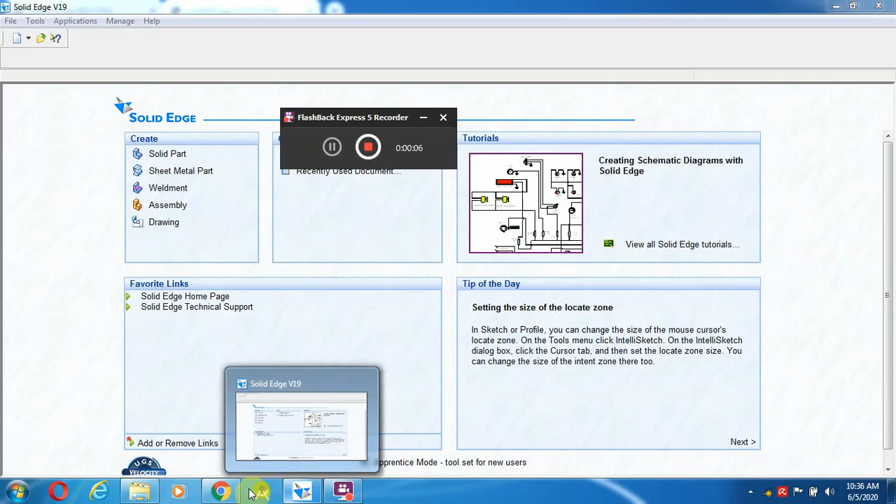So the lathe tool holder component will be shown over here, with sectioned front view, top view, and side view. These are all the things we have to draw in the sketchbook without dimensions, and neatly we have to draw. That is the point to remember.

Then comes to the parts. There are totally 11 parts in the tool holder: tool holder, base plate, mover, stud, handle, knob, ball, spring, set screw, grub screw, washer. 11 parts are there. We have to create these with Solid Edge.

After creating them, we are going to make the assembly with the help of the assemble tool on the Solid Edge software. So first we are going into the solid part, and after that we are going to create first the tool holder.

First part is the tool holder. There are only two views given: a sectional front view as well as the top view, provided for the tool holder. If you see the full sectional view, only these portions have material.

These are all holes, as well as here a V type of hole, a bottom V type hole will be provided, and also one more cylindrical hole, and another cylindrical hole that goes throughout the component.

And also there are certain blocks they will be providing, like 1, 2, 3. Here they have not given it as a circle anywhere, so it becomes a square or rectangle. The dimension given is for a square, so the length is 150 on this side and 150 on the other side. This is how we have to create it in the software.

First we can go to the protrusion command. We select a front view, or you can select the top view. I am going to select a line and go to here. What is the dimension on the top? Actually this and this will come in the same line.

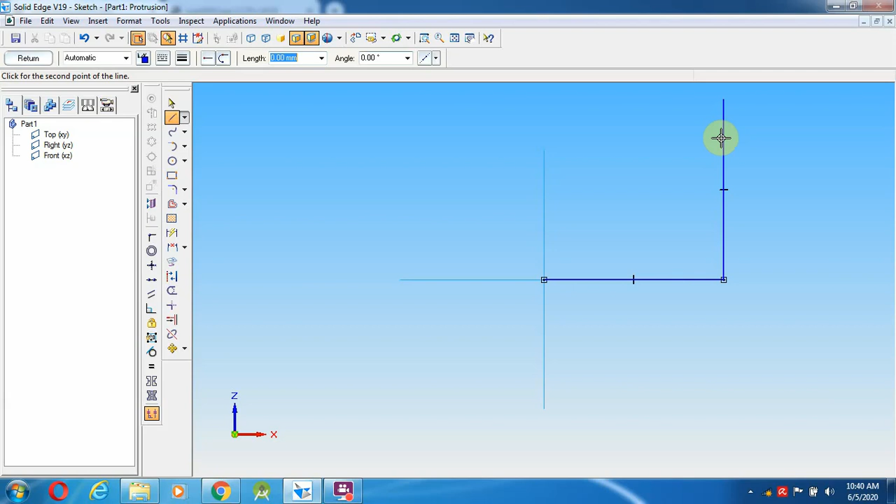Enter, again 75. Now I am going to give 150, and the angle is 180 towards the left side, so that angle comes as 180. Now again 150, enter. So here 150 is going to join over here.

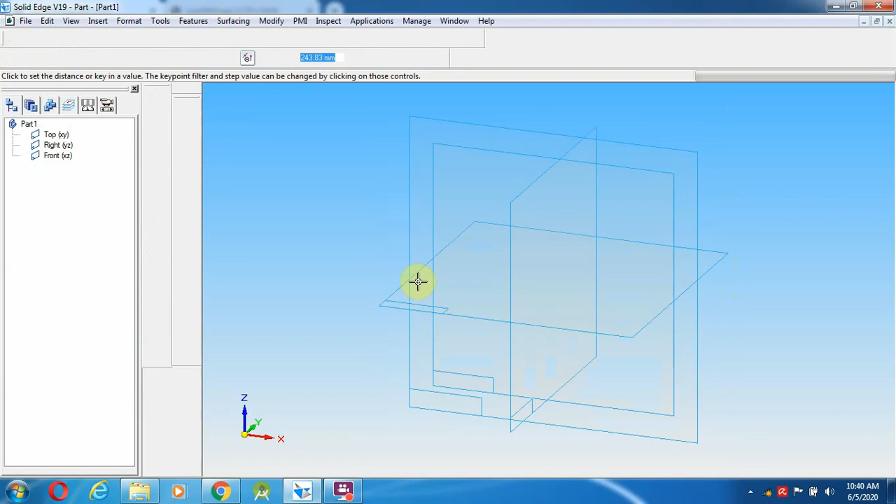Then select the line and delete those reference lines. Then give a return. So how much mm does it have to be? 30 mm in depth. So 30, enter, left and right click.

After giving this, I am going to make another one, the next smaller one. This is also given here as a square of 80 mm. While seeing from here it will also be square, even with the help of this dotted line you should understand. That is the depth of 40 mm.

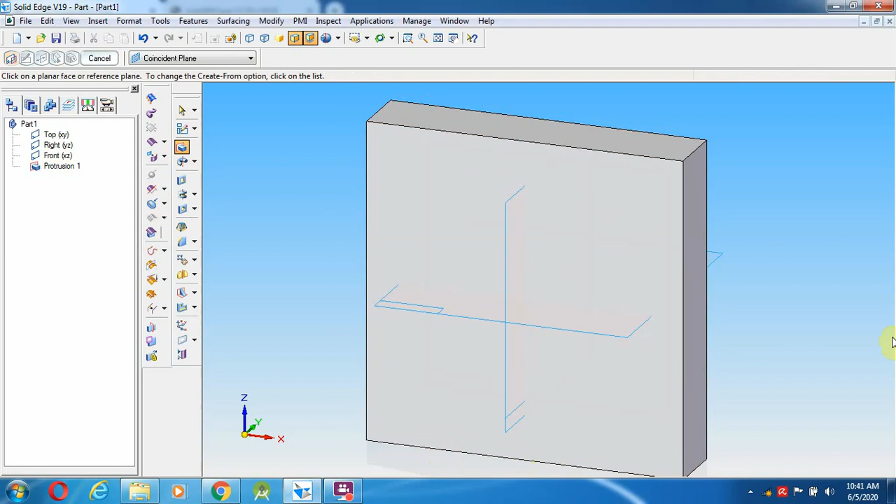Go over here — either this side or that side, you can choose anything. I want to keep the plane on this side, so I am going to select this side to draw the things.

I'm going to select a line from here to 80 mm, meaning 40 mm distance, and again 40 mm towards the top. Now I'm going to give 80, enter, again 80, enter, so 80.

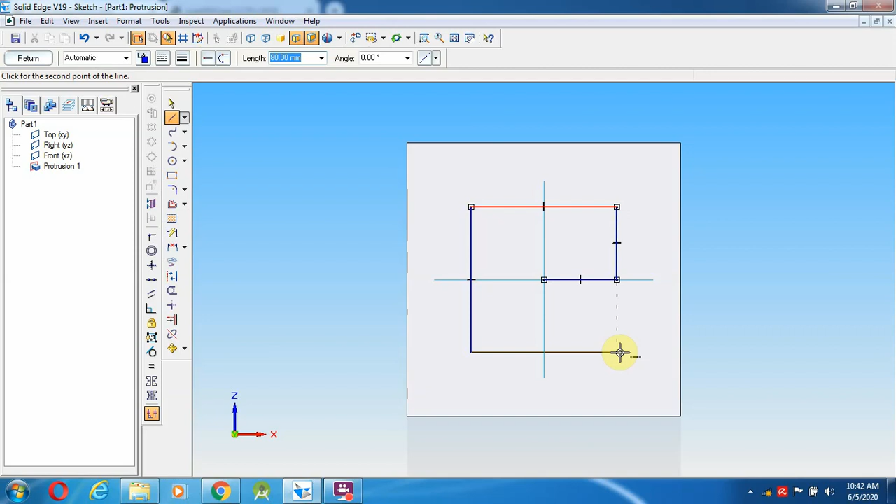Now I'm going to join with these lines, then select the particular line and you can delete that line. Now giving return, so towards this side the depth is 40 mm, it has to come over here.

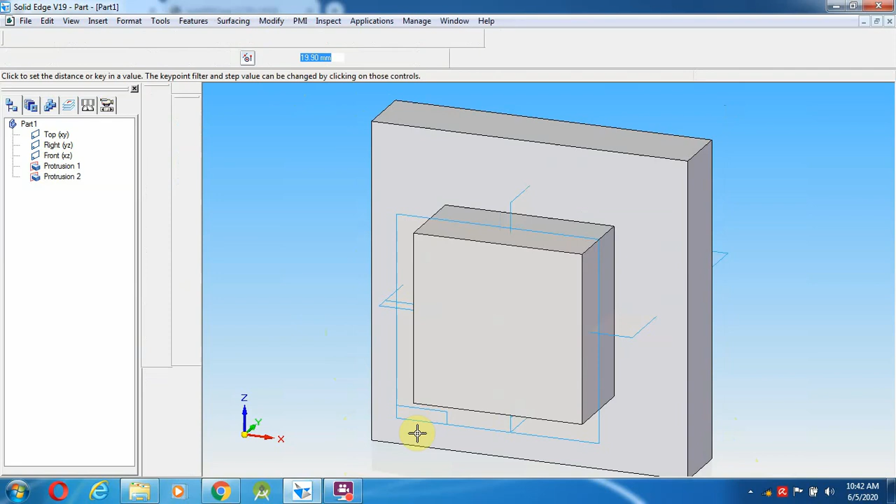After creating this, again go over here, select, and draw the bottom block. The bottom block has the same dimension as the top one. Select the edges over here, and the dimensions will remain almost the same. Give return. This will be 20 mm distance — the depth is 20 mm. Select distance 20 mm, enter, and towards this side left and right click.

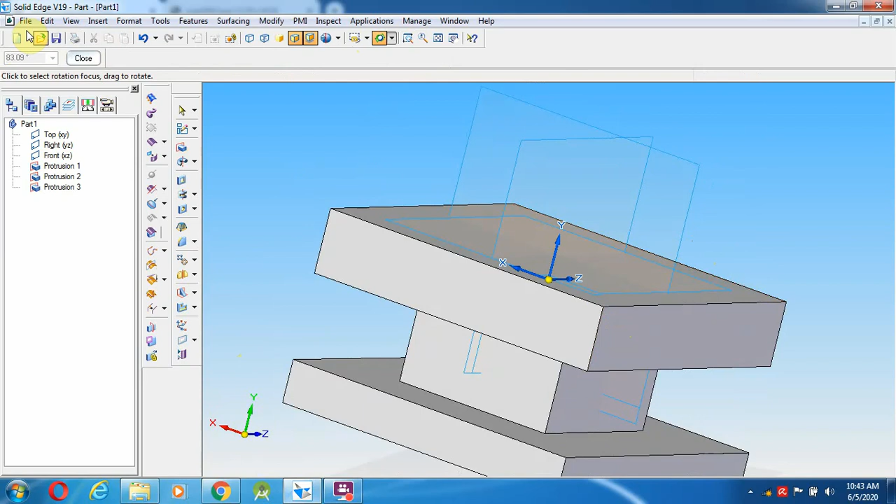Now going to rotate this component, rotate the component, then you can save it. Go to save as, and you can save it in the particular area.

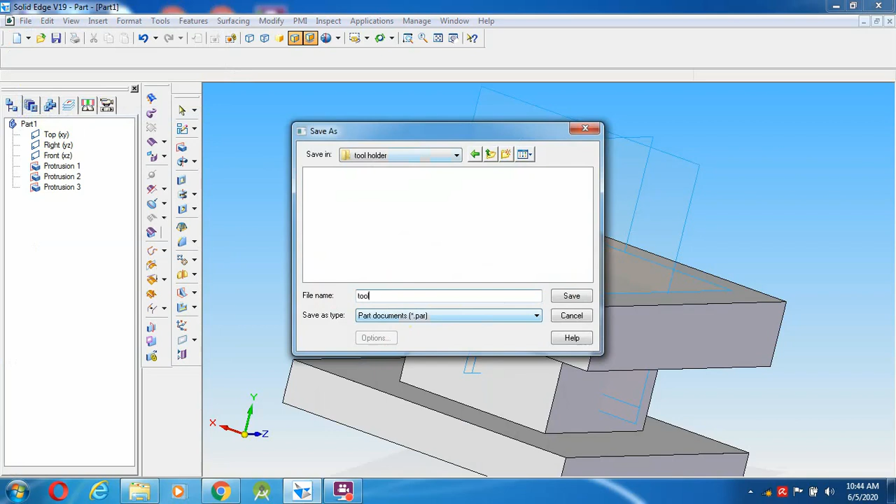So I created the folder over here, tool holder. I am going to save the particular things there. Go to save as, and change save to this tool holder folder. So the particular component name itself I am going to change, make it as tool holder. So the component has to be saved over here.

Still so many things have to be done over here, so that's what I am going to do now. Select first the dimension from here, it has 120 mm, 120 mm length from length and breadth. Okay, the holes have to be placed.

So these holes will be in a continuous line, so from the top it can be viewed. The dotted holes could not be seen from the top, so that becomes the bottom block.

So in the top block there are 8 holes, M16 tapped. So 8 holes will be placed, and it is made with the threaded one.

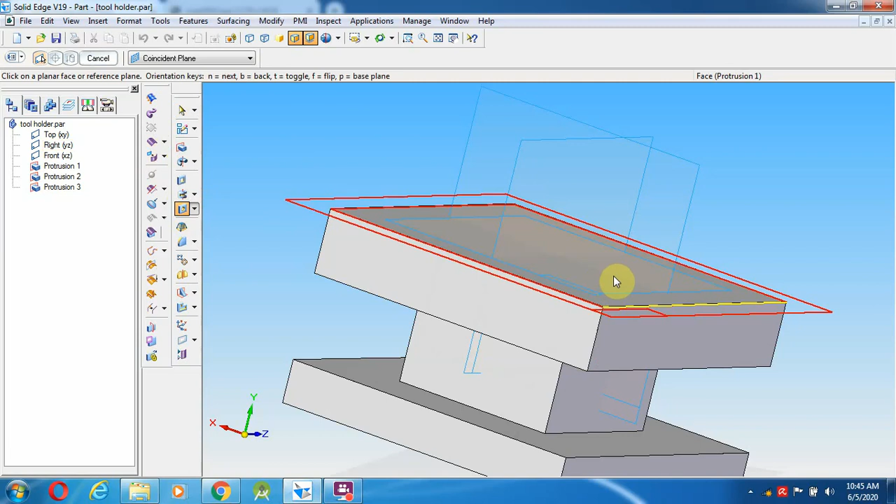I'm going to select the hole command, go over here, select hole command. I'm selecting the top surface. In the top surface I'm going to make a 120 mm distance first, so all the dimensions will be 120.

So from here to here 120, even horizontally they will be showing as 120 mm. So that's I am going to make it as a 120 mm hole.

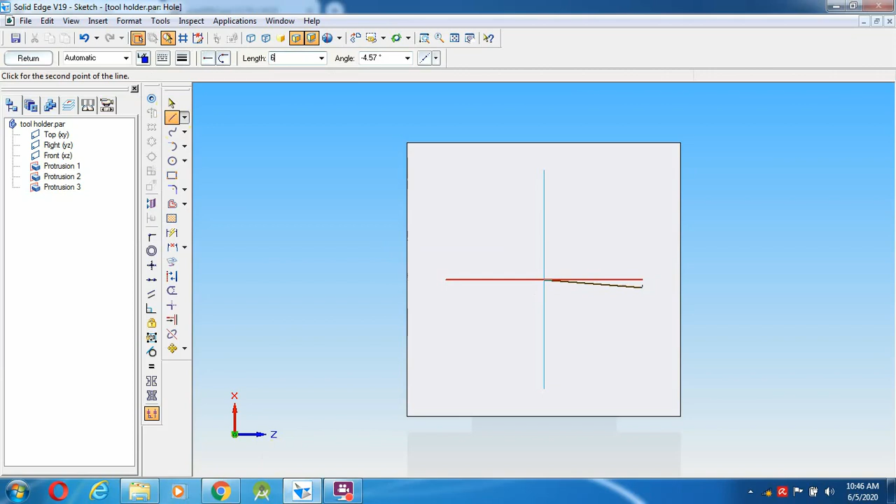So select a line, from here to 60, from here to 60 mm length, and 60, 120, and again 120. So next 120, then I'm going to join over here.

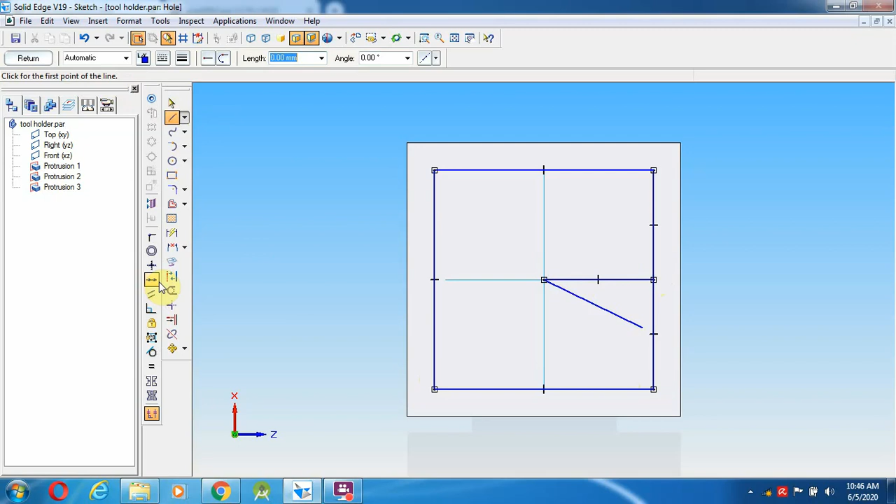So here these are two lines I drew, one line is drawn for reference purpose, and another line I drew mistakenly. So those lines I trimmed over here.

After that I am going to select the hole and change the hole parameters. The hole diameter is given as 8 holes, M16 tapped, meaning 16 mm diameter and 8 holes placed with threaded hole. So go over here and make it a threaded hole with diameter 16 mm.

So go over here, select the 16 mm, as well as the M16 also 16 mm to hole extent. So because the hole is coming throughout, the taper is coming.

Even if you see from here, the continuous line followed by a thin line, thick line followed by thin line means that is the symbol of hole over here. So select throughout that one, and this is the meaning through to next. Even you can give the dimension as through to next.

Okay, and after that the through hole will go throughout that particular top surface. So what happens, the bottom does not require any V shape or other thing.

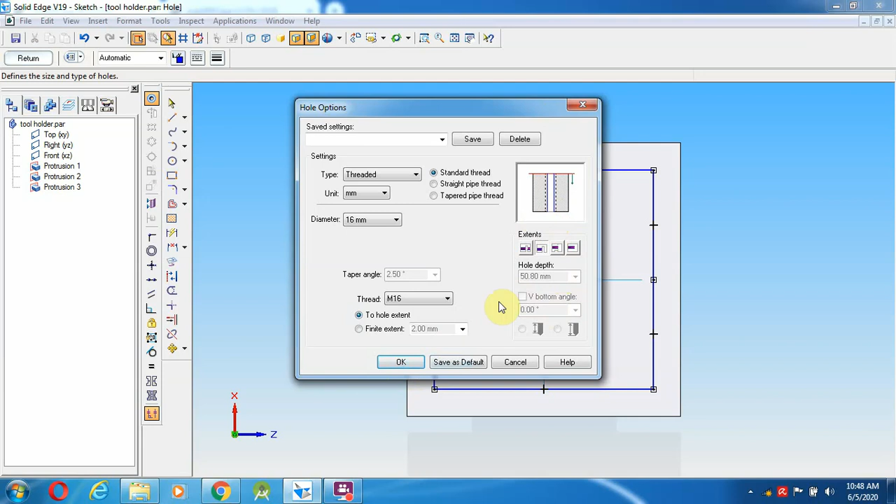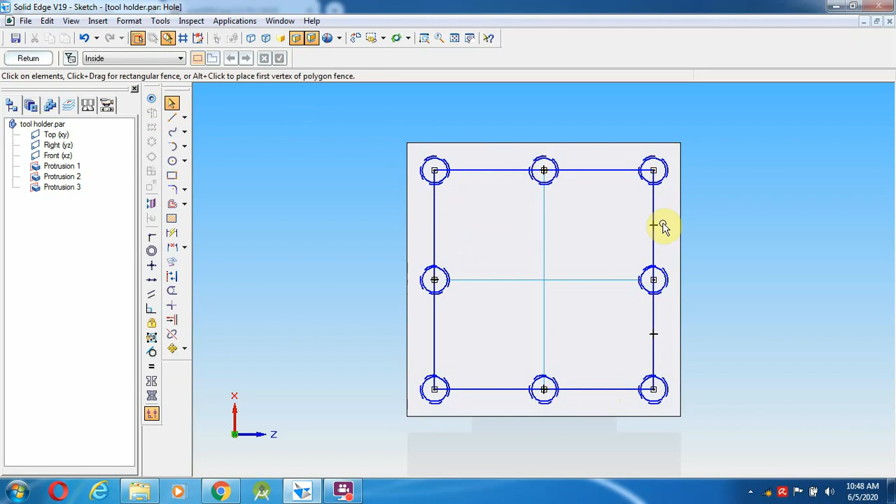So 8 holes: 1, 2, 3, 4, 5, 6, 7, and 8. So there are 8 holes now. From the corners as well as in the middle I am going to place the holes, so corner 4 and middle 4.

So after keeping this, give return towards down, left and right click. If you see over here, the holes have been created in the top. Then after that immediately you can give save.

So after save, then another hole. This other hole comes in the bottom, see over here, it comes in the bottom. Then the 16 mm length the hole is coming, and the diameter is 10 mm.

The diameter is 10 mm and V shape. So here how many holes are there? The dotted holes, see over here, they will be provided over here, so there are 4 holes. Even here in height 4 holes. So it is a normal hole.

Then diameter is from here to 52 mm distance. Almost on the other side also it is 52 mm distance only. From horizontal 52 and vertical also it is 52 mm distance.

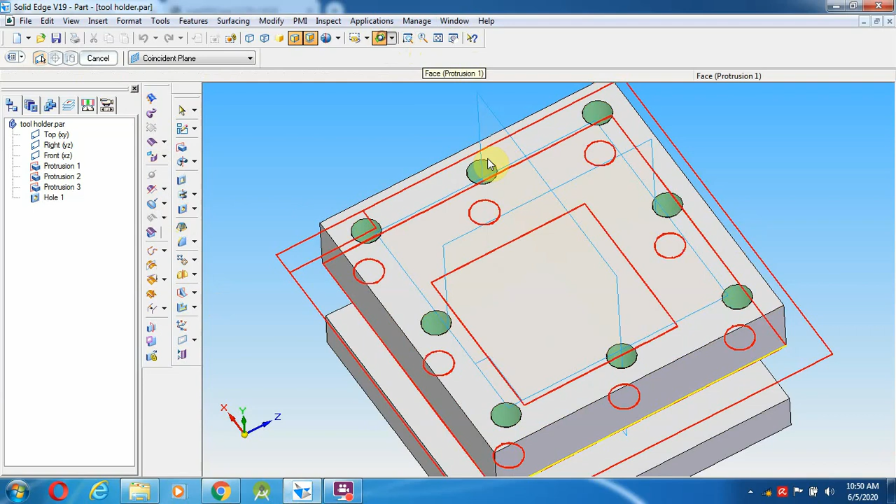So go here, select again the hole option. I'm going to rotate the block and give fit, and select the bottom one. After giving the bottom, select a line from the mid line.

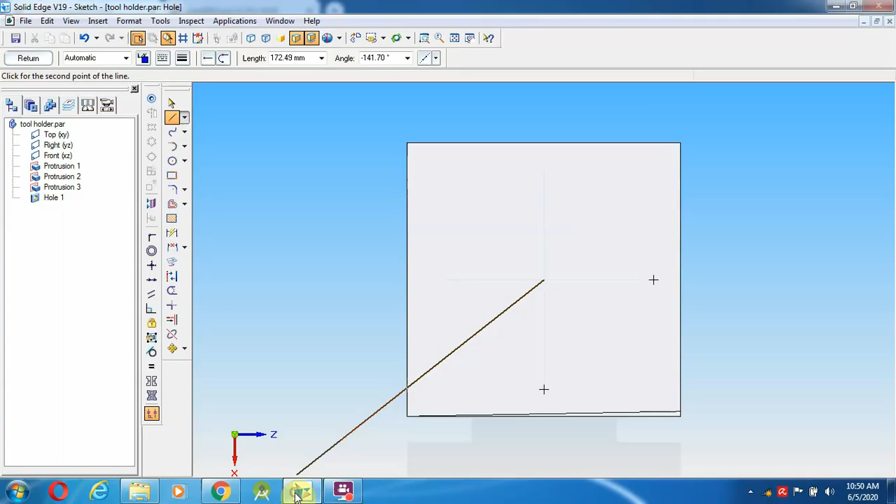So you could not be able to find the mid, so you can draw a line and find the mid. So 52 means actually from the mid to 52. So no need to worry, mid to 52 mm distance. So 52, enter, again 52, enter.

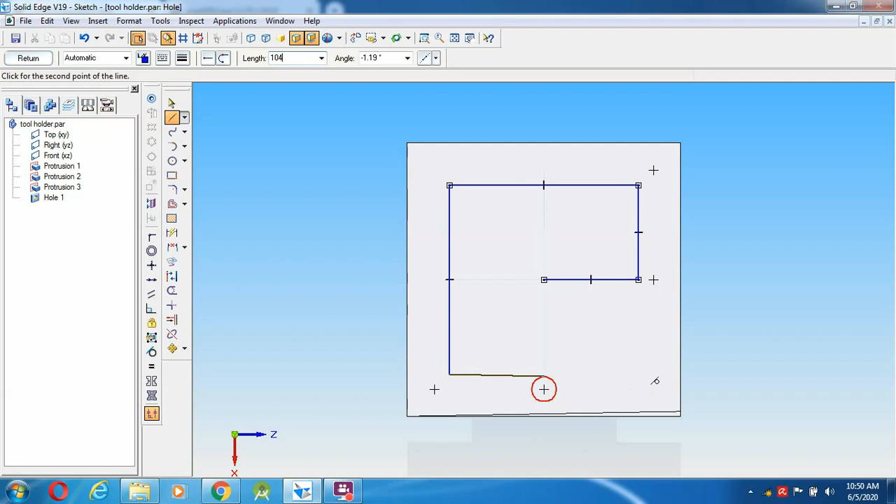90 degree, enter, and 104, enter, 104, 104, enter. I'm going to join.

Even this line also you can keep it, nothing will affect, but anyhow it doesn't look good, so I'm going to delete it. Even you can keep it means we will keep it.

Go over here, so the hole is a simple hole, diameter is 10 mm diameter. And through not next, the finite extent value, what is the length, is 16 mm as given.

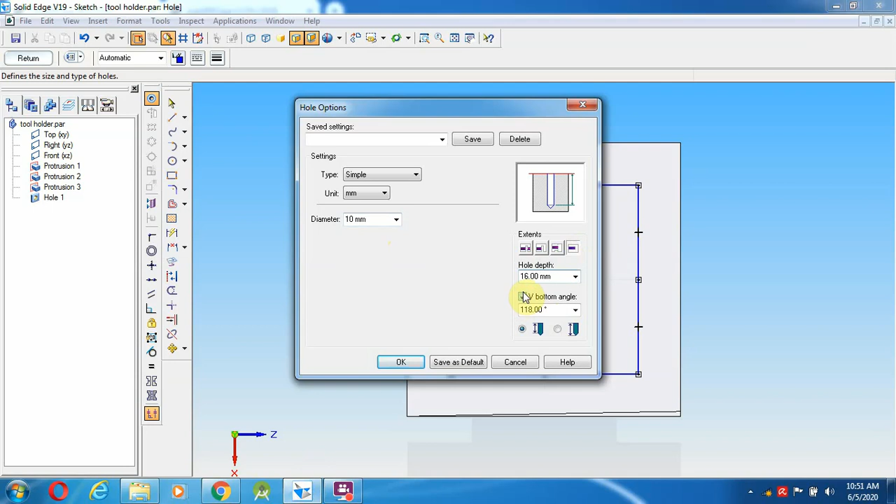So that I'm going to select as 16 mm here. After selecting the 16 mm V bottom, I'm going to give 118 degree, so exactly it will be placed on the mid over here, so mid of the lines. So I'm going to keep it over the mid.

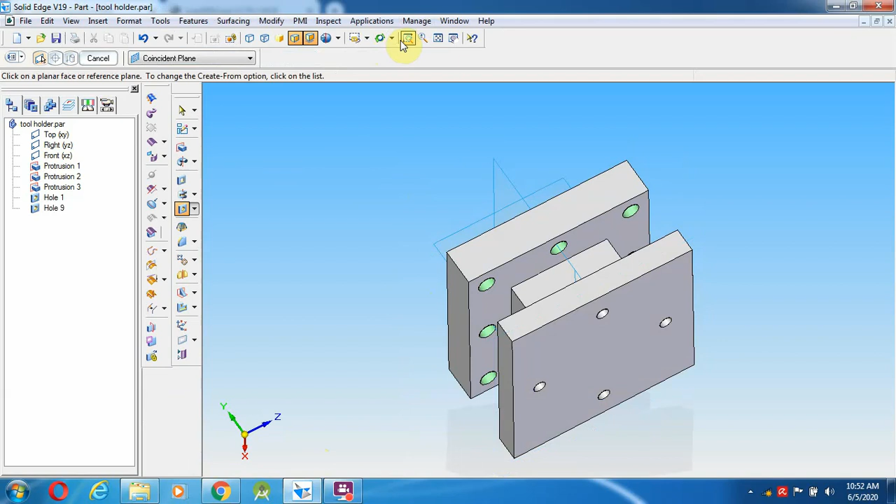After keeping all the 4 holes, I'm going to give return towards up, left and right click. We always give left and right click this way. If I give 45 degree, automatically the V shape will come up to the surface, that's why I haven't given 90 degree here. Then I'll close and save whatever I've done.

After this, I'm going to make this hole. It is given here as 60 mm, as well as 1.5 mm, and another will be 10 mm. So the straight cylindrical hole comes up to 10 mm distance, and the 1.5 mm comes as a tapered one, the small one.

That's why here it shows as two circle edges. This edge indicates this one, and the other edge indicates the 45 degree where it cuts the bottom edge. So those edges are shown as those two circles over here.

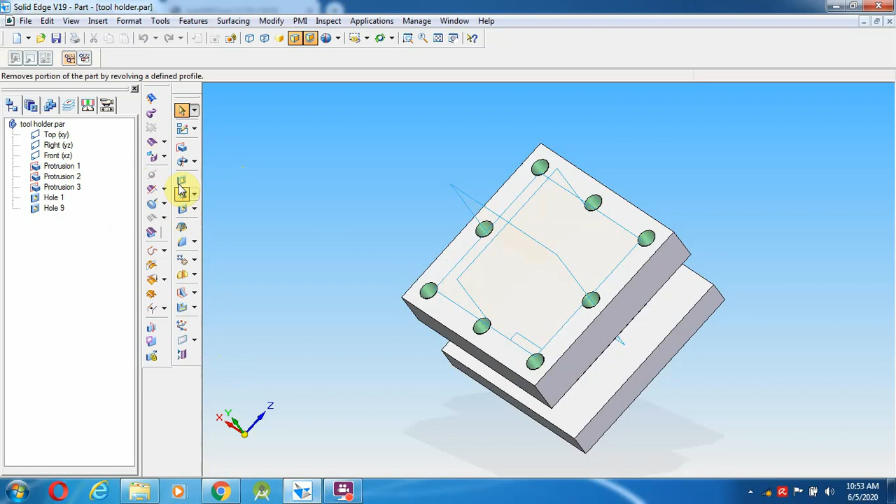Then go here again. I'm going to select the bottom circle, go here, select the revolved cutout option. Now I'm going to select the revolved cutout option, meaning even in a single step we can complete it. So in the bottom surface, not bottom surface, revolved cutout.

Now I'm going to select any of the mid planes. This is the mid plane. These things come in the bottom over here. So that is the thing I'm going to draw, from the middle.

After 10 mm I'm going to make it at 45 degrees. This is towards left, 180 plus 45 equals 225 degrees. So I'm going to give 225 degrees. Now I'm going to complete it.

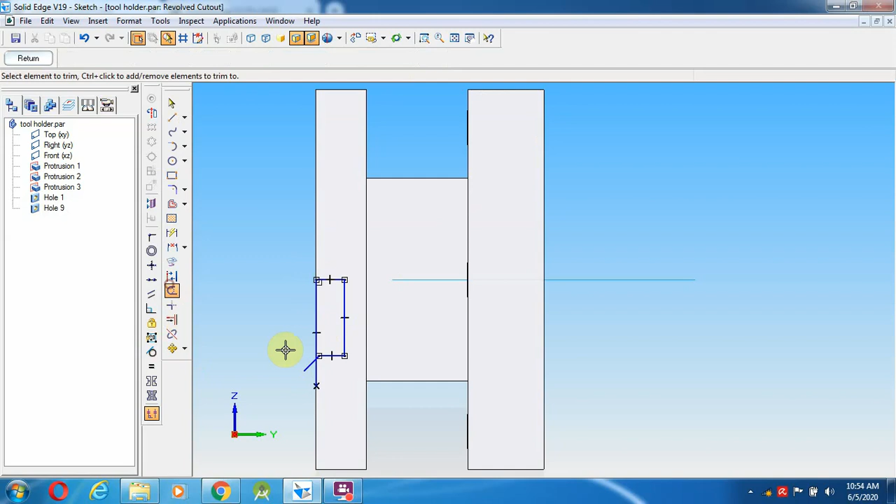This surface I'm going to close. Then with help of the trim option, these two lines I'm going to trim. Select the axis of revolution as this. I'm going to give return and rotate, and see the rotation.

So 360, or otherwise here the one more option is called 360, and automatically it will be created. So like this way you have to do this particular cutout in the bottom.

After making this, go over here and select the full depth hole. What is the full depth hole? What is the diameter over here? The full depth hole is 26 mm, shown in the top view. So that is the 26 mm.

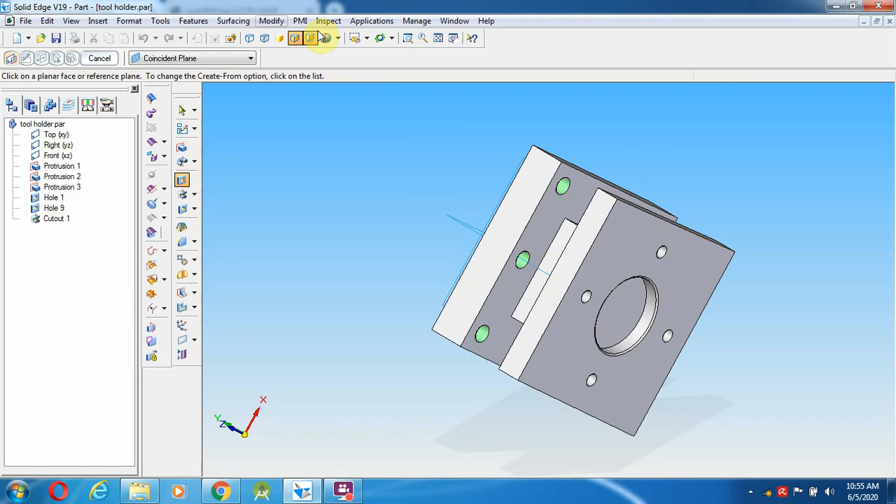So that I am going to make with help of the cutout option. Even bottom surface or top surface, anything you can select for that, because the hole is coming throughout the component. So any surface you can select, either top or bottom, but I'm going to select the bottom because the view will be clear.

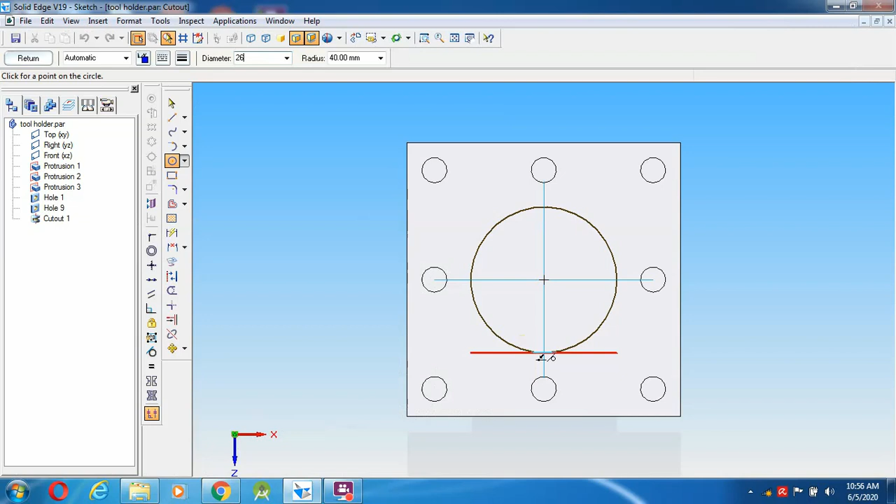So cutout top and select the circle. Here once again I'm going to check the dimension, 26. So 2, 6, enter. I'm going to give return towards down, left and right click, and save the component. So after saving, what is the thing? This has to be created here also, this is created, even this hole, and almost everything is created over here.

If anything is left out, we will see it while assembling. At that time you will get it, and that time also you can change over here. So as of this, almost all the things we have completed. I'm going to give save and close, then move on to the second component, that is the base plate.

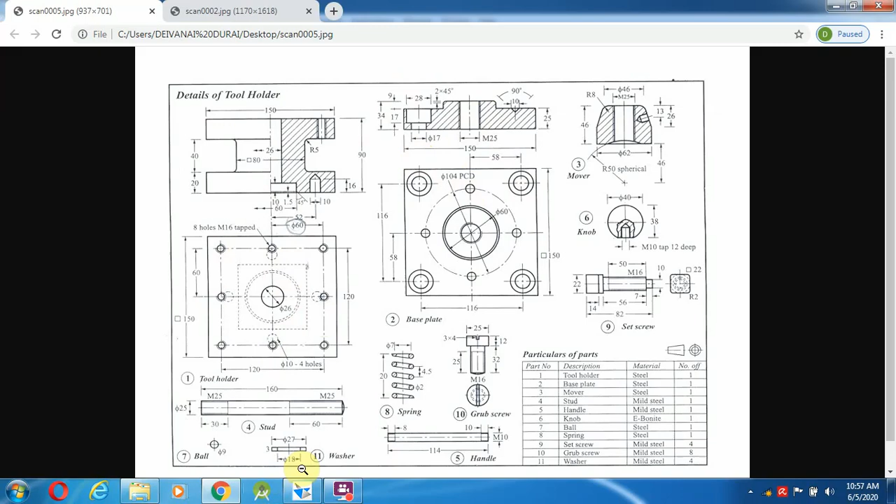The base plate is provided here. For the base plate, only certain things you have to remember over here. Another thing, almost everything is completed. I'm going to save this.

After saving this, I will check. So even some more things you can do with this video. I will close, and again going to select a solid part. After selecting the solid part, now I'm going to do this one, the base plate.

In the base plate it has the same length and breadth, so it is 150 mm. Here it will be mentioned as a square, as 150.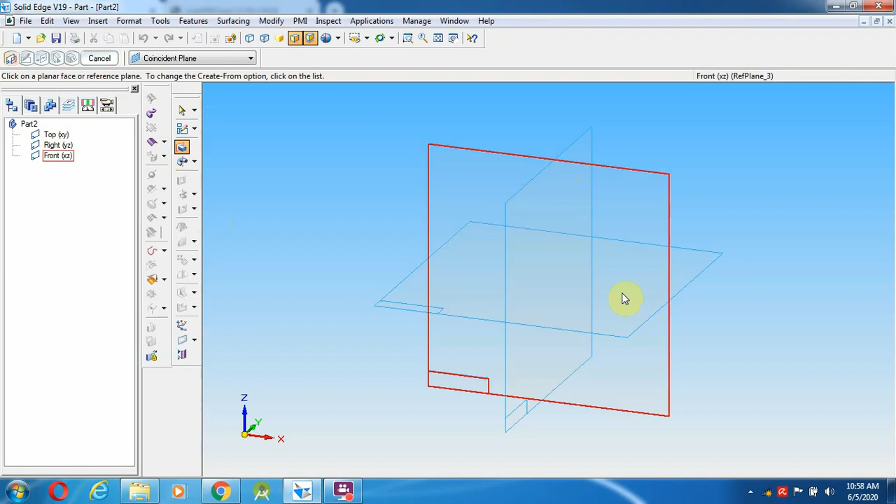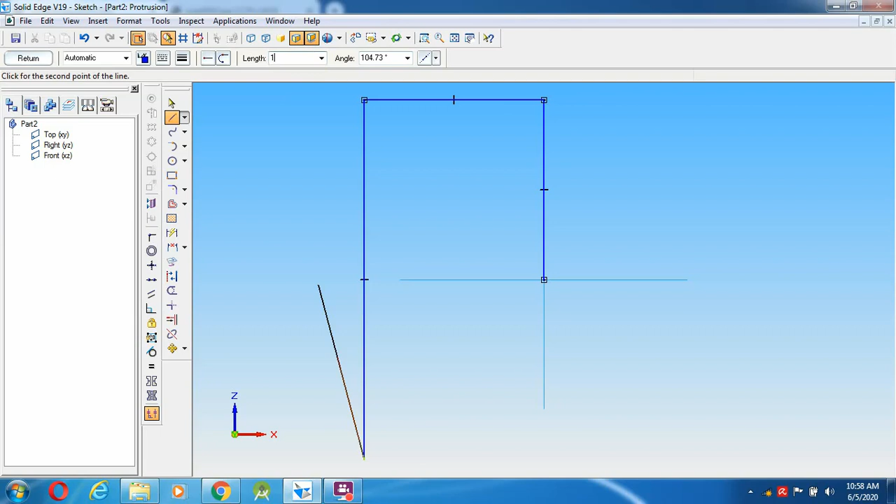Select the portion and from here, front view only, select like 150, 75 mm, 75 enter, again 75 mm enter. So here 150, 75, 150, this one 150 enter, 150, 150 enter. Going to close over here and use the trim or delete option.

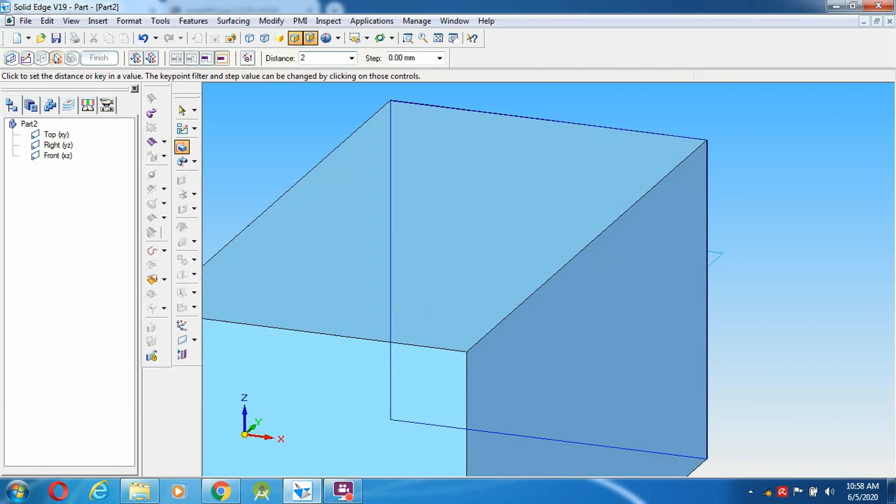Then give return. What is the depth of the component? It is 25 mm. So I'm going to give 25 over here. After giving the 25 mm, either front or back, it's not an issue.

Then the top has some V cut, it will be placed over here to place the ball there. That is the V cut, at a 90 degree angle, and comes into the other thing. It will be placed on the pitch circle diameter of 104.

So there are 4 holes to be placed, and the hole diameter is 10 mm. I'm going to select the hole option again, selecting the top surface.

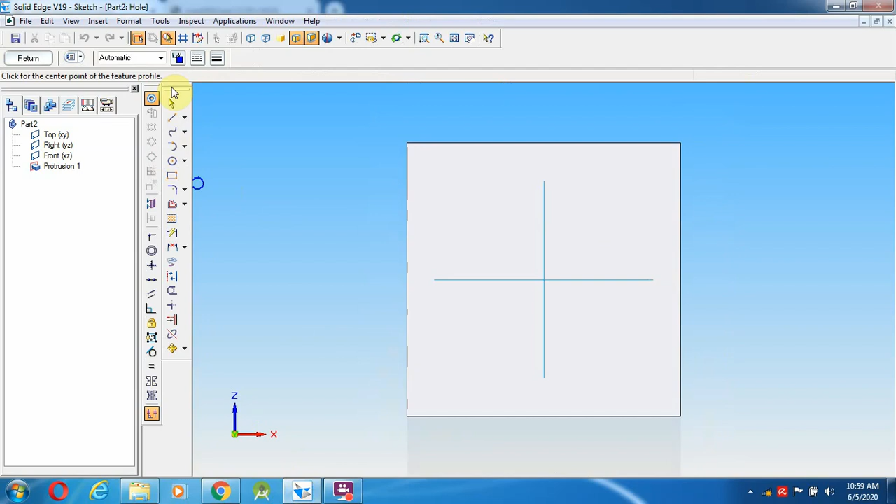Select as a circle, pitch circle diameter 104 mm. Enter, and select hole parameter, goes to a normal simple hole. The diameter I am going to give is 10. After giving 10, it's not through, so not full depth. The hole depth can not possibly be 0, so I am going to give 0.1, and V bottom angle is 90 degrees, already given in the question. Then we can choose from here. Select, give OK.

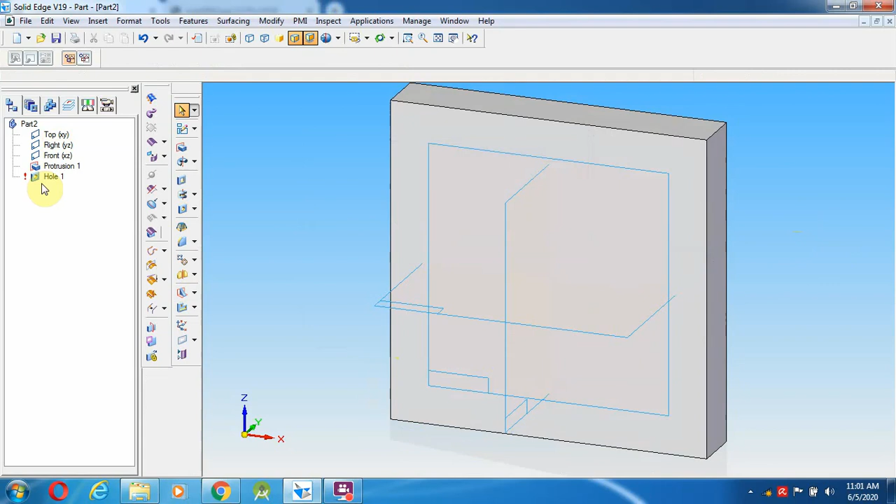I am going to place it in the middle, circle over here, somewhere here, then give return towards left and right click. Some problem may occur while selecting those things, so once again we will do it.

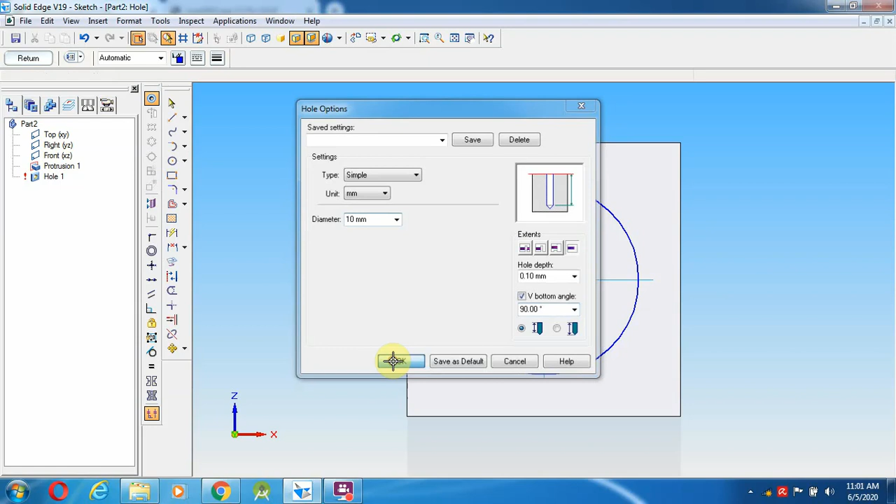From here I'm going to make a circle with 104 mm diameter. Again select the hole parameter, simple 10 mm hole diameter, hole depth 0.1, as well as V bottom, maintaining 90 degrees. Give OK, I'm going to place over here. After placing this, give return towards down, left and right click. While selecting from the hole top to V bottom end, it created a problem over here, so we can rectify it. Then the hole has to come over here.

Now the next thing is we have to do this particular surface, which has a diameter of 60 mm. What is the height? Total will be 34, minus 25, there is 9 mm. So 34 mm diameter as well as 9 mm height. Actually I'm going to make it 60 mm, not 34, 60 mm diameter.

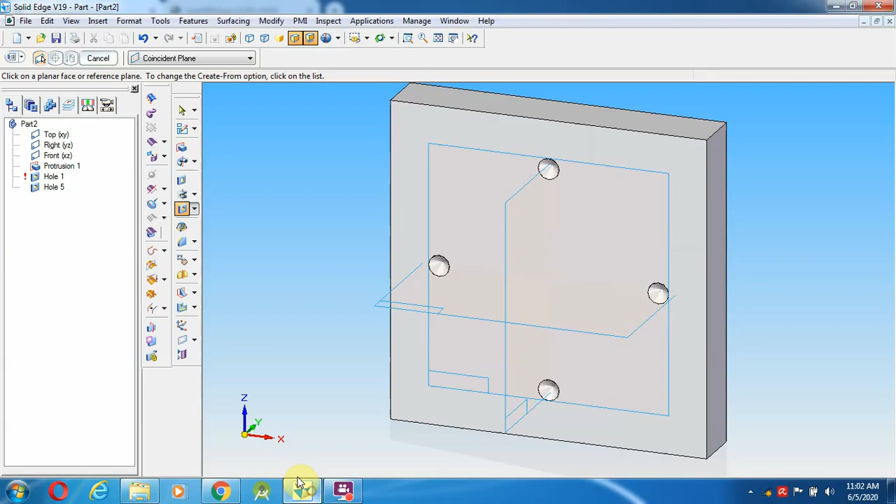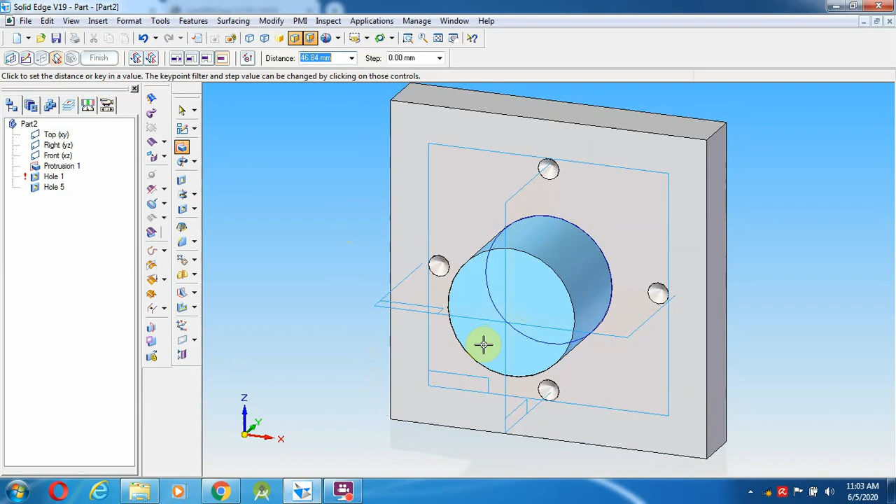Going to select protrusion on this particular front surface, select circle from here, I'm going to make this a 60 mm diameter, and give return towards front, this will go to 9 mm. Left and right click, go over here and select the round option, I'm going to select this particular surface, not round, so chamfer.

We'll see over there, here they given us 2 into angle 45 degrees, so it comes as a chamfer. I'm going to select the chamfer over here, top, setback I'm going to give 2, so the 45 degree angle chamfer has to be created over here.

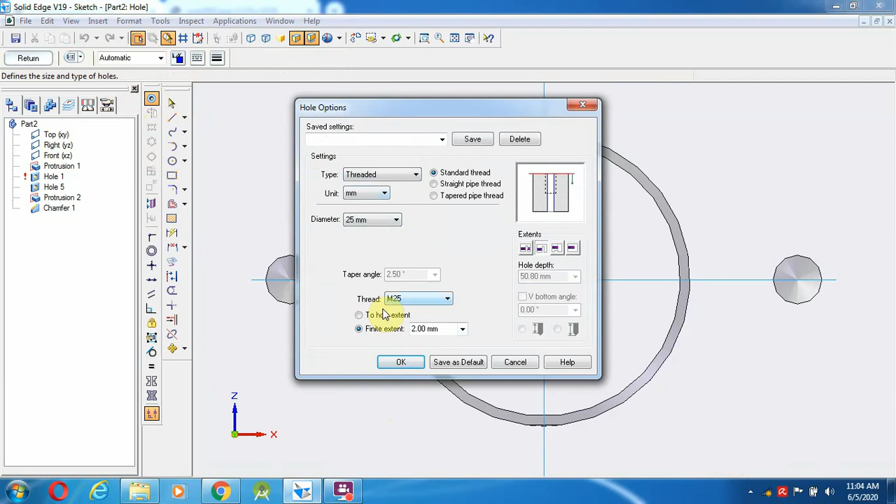After creating this, I'm going to draw the middle hole. What is the middle hole? M25. So from here, select the hole, the top surface, and go to the hole parameter. It is a threaded hole, I'm going to give M25, and 2 hole extent, through next, give OK, and select as a mid point, then give return towards left and right. So that hole has to be created over here.

After creating the hole, another thing has to place these 4 holes. What is the distance? 116 mm distance from horizontal and vertical. That hole is the counter bore hole. The hole diameter is 17 mm, and 17 mm depth. Counter bore diameter is 28 mm, and hole diameter is 17 mm. If completed, this particular portion has to be done.

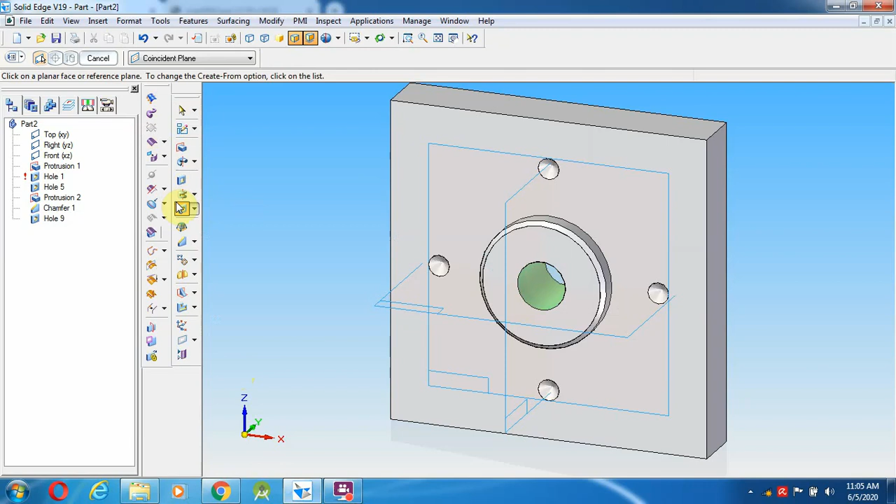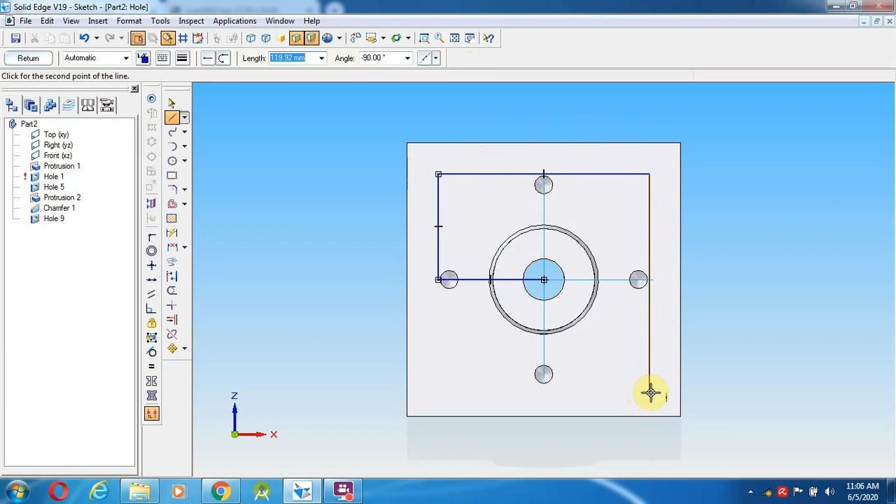I'm going to select again the hole option on this particular surface. Select line from mid to 116 mm, means 55, 56, 58 mm, so 58, and again 58 and 116 mm, 116, angle, enter, angle 0, and again 116, enter, 116.

Going to join these lines over here, trim, go to your hole parameter, select here as a counter bore hole.

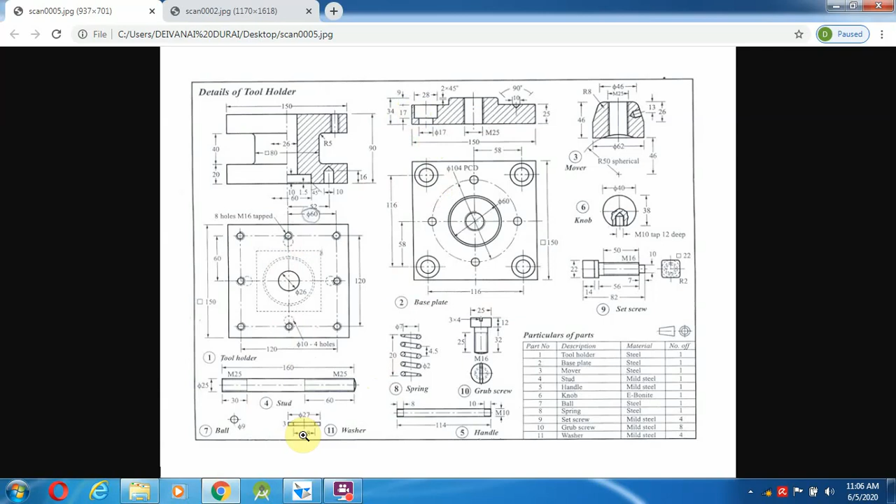Diameter of the hole is 17 mm, you have to remember that, and hole diameter, counter bore diameter is 28 mm. So counter bore diameter is 28, and the normal hole is 17 mm, it comes up to 17 mm distance, and the counter bore depth is 17.

Then through next you can give, I'm going to place in the corners of that. Once placed in the corners of the lines, give return towards left and right direction, and going to save the component.

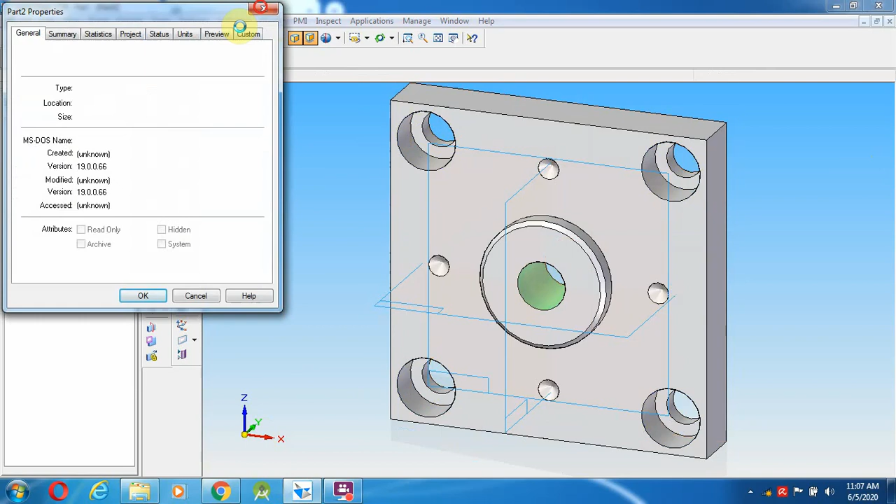Saving it with the name base plate. Go to here, select base, BAS, base. After saving this, you can close the particular things. So with these 2 points, this video is going to end. The remaining things we will see in the next video.